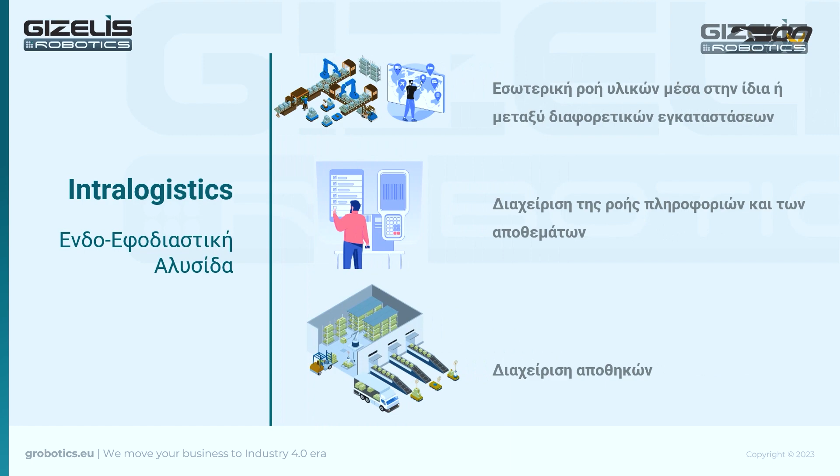Τις προκλήσεις τις γνωρίζετε εσείς πολύ καλύτερα από εμάς. Εμείς το μόνο που μπορούμε να κάνουμε είναι να είμαστε τα αυτιά σας, να ακούμε τα προβλήματα που έχετε να αντιμετωπίσετε και στην κατεύθυνση αυτή να σας δώσουμε τις κατάλληλες λύσεις. Έτσι λοιπόν έχουμε ομαδοποιήσει 4 κατηγορίες.

Το πρώτο κομμάτι αφορά την πολυπλοκότητα της εφοδιαστικής αλυσίδας, με τον αυξημένο αριθμό κωδικών, SKUs, τα πολύπλοκα δίκτυα διανομής, όπου τα προϊόντα πρέπει να φτάσουν σήμερα, καθώς και την έκρηξη του ηλεκτρονικού εμπορίου, όπως αυτή προέκυψε με όρους κρίσης εντός της πανδημίας και μετά.

Ένα δεύτερο σημείο είναι η παραγωγικότητα και τα κόστη. Γνωρίζουμε πολύ καλά ότι το να βρεις ανθρώπους σήμερα οι οποίοι να κάνουν την επαναλαμβανόμενη δουλειά ενός χειριστή είναι δύσκολο, οπότε υπάρχει δυσκολία ανεύρεσης προσωπικού. Ένα άλλο στοιχείο είναι τα υψηλά λειτουργικά κόστη, όπως προκύπτει με τις αυξημένες ενεργειακές τιμές. Έπειτα, οι απορρίψεις λόγω ελαττωματικών προϊόντων που προκύπτουν από το ανθρώπινο σφάλμα, το οποίο δυστυχώς δεν μπορούμε να αποφύγουμε. Αλλά και τον αυξημένο αριθμό προμηθευτών, όταν μιλάμε για μια παραγωγική εγκατάσταση, οι οποίοι πρέπει να επικοινωνήσουν μεταξύ τους προκειμένου να δώσουν μια λύση.

Και πολύ περισσότερο τη στενότητα, τη συμφόρηση, το bottleneck που λέμε, στο τέλος της γραμμής, όταν ένας χειριστής περονοφόρου καλείται να παραλάβει μια παλέτα ή να διακινήσει προϊόντα.

Ένα τρίτο στοιχείο είναι η ασφάλεια και η αειφορία. Η ασφάλεια, νομίζω είναι κοινός τόπος, αποτελεί πρώτη προτεραιότητα των οργανισμών. Αλλά όταν μιλάμε για διακίνηση υλικών, μιλάμε για μετακίνηση μεγάλων φορτίων και για ατυχήματα που μπορούν να στοιχήσουν ζωές, να προκαλέσουν τραυματισμούς, κάτι που σε καμία περίπτωση δεν θέλουμε στις εγκαταστάσεις μας σήμερα. Αλλά και την ελλιπή εργονομία, όπως αναφέρθηκε και νωρίτερα, για τα σακιά τα οποία πρέπει να στιβάξει κάποιος πάνω σε μια παλέτα.

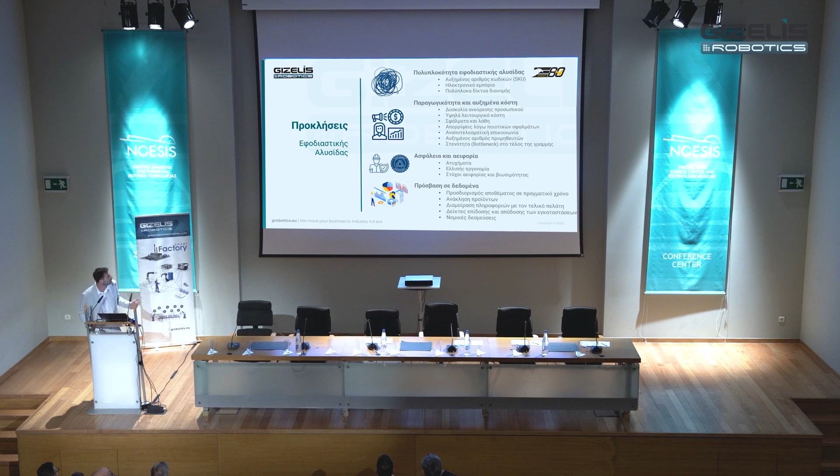Τελευταίο κομμάτι είναι η πρόσβαση στα δεδομένα. Και όταν λέμε δεδομένα, μιλάμε για τον πλούτο μιας εταιρείας. Είναι τα στοιχεία εκείνα που επιτρέπουν στους οργανισμούς να λαμβάνουν σωστές αποφάσεις. Ο προσδιορισμός λοιπόν του αποθέματος σε πραγματικό χρόνο είναι κάτι το κομβικό, και είναι κάτι το οποίο μόνο ένας ψηφιακός μετασχηματισμός μπορεί να μας δώσει. Αλλά και η διαφάνεια που απαιτείται σήμερα και συχνά η απαίτηση από τους πελάτες μας να τους δίνουμε στοιχεία σχετικά με όλη την παραγωγική διαδικασία που αφορά το προϊόν μας. Αλλά και τους δείκτες επίδοσης που έχουμε θέσει, τα KPIs, προκειμένου να μετρήσουμε την απόδοση των εγκαταστάσεών μας και τα στοιχεία τα οποία καλούμαστε να διαμοιραστούμε από τις νομικές δεσμεύσεις τις οποίες έχουμε.

Πώς διαμορφώνονται όμως τα σύγχρονα intralogistics και πώς θα αντιμετωπίσουμε τις αυξημένες προκλήσεις της εποχής. Όλοι έχουμε ακούσει πολλούς όρους εδώ μέσα σήμερα, robotics, AGVs, κινητά ρομπότ, αυτόματες αποθήκες, περονοφόρα, ταινιοδρόμους, WMS, ERP, συμβατικές αποθήκες. Όλα αυτά έρχονται παρέα και με έναν εγκαταστάτη, με έναν προμηθευτή, δημιουργώντας ένα χάος στον τρόπο που θα λάβει την απόφαση ο επιχειρηματίας για το πώς θα κινηθεί.

Η απάντηση που δίνουμε εμείς σε αυτό είναι ότι επιλέγουμε να σας δώσουμε μία λύση από μία πηγή. Η GIZELIS ROBOTICS με τα ρομποτικά της συστήματα, σε συνδυασμό με τις ολιστικές intralogistics λύσεις της Electric 80, έρχονται να καλύψουν τις ανάγκες σας και να κουμπώσουν στις υφιστάμενες εγκαταστάσεις σας, στις συμβατικές σας διαδικασίες, στον τρόπο που δουλεύετε σήμερα.

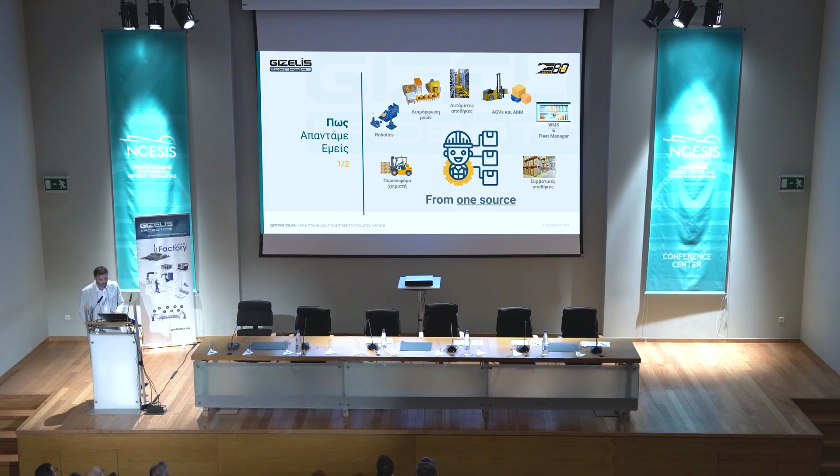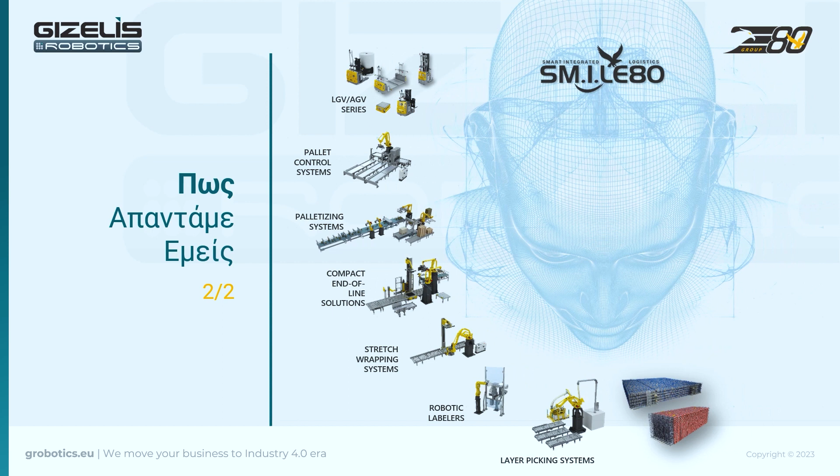Όλο αυτό γίνεται με τη βοήθεια ενός λογισμικού, το SM.I.LE80 της Electric 80. Είναι ένα λογισμικό το οποίο ενοποιεί πρακτικά τις επιμέρους τεχνολογικές λύσεις, είτε μιλάμε για παλετοποιητικά συστήματα, είτε για LGVs, είτε για αυτόματες αποθήκες, μηχανές περιτύλιξης, μηχανές ετικετοποίησης και πάει λέγοντας. Αυτός είναι ο τρόπος που προσεγγίζουμε εμείς τις λύσεις και γι' αυτό έχουμε την αυτοπεποίθηση ότι θα δώσουμε λύσεις στα προβλήματά σας.

Αυτό λοιπόν που συμβαίνει με την Electric 80 και τη GIZELIS Robotics είναι μια στρατηγική συνεργασία παροχής ολιστικών λύσεων σε όλο το φάσμα της ενδοεφοδιαστικής αλυσίδας.

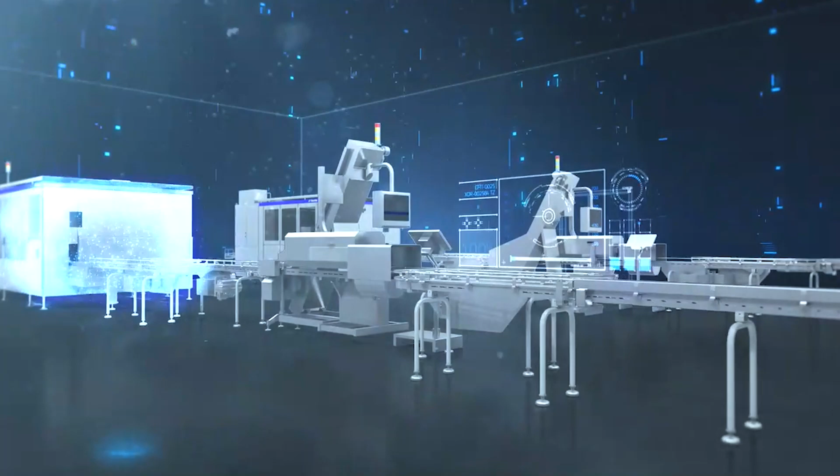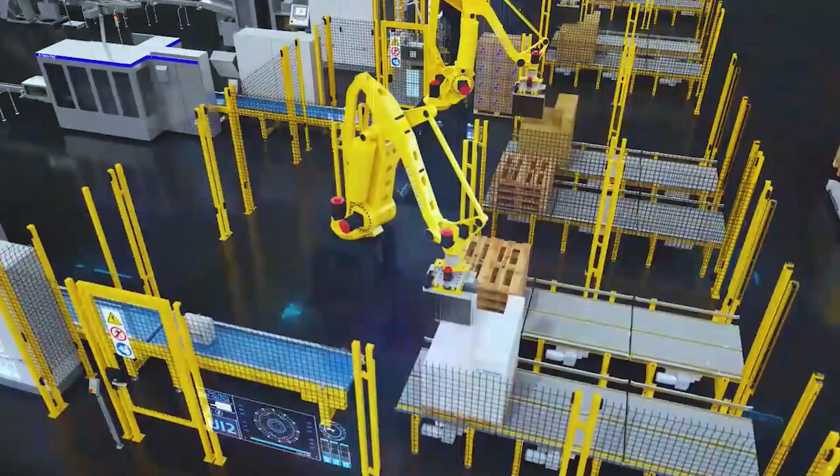History led us to achieve levels of excellence in hardware, but today this is not enough to guarantee true efficiency. If we imagine the factory as a great orchestra, the position of the conductor is up to the software. And precisely here, at this level, we think to make the difference by ensuring a unique level of integration, flexibility and efficiency. The objective is to automate all operations.

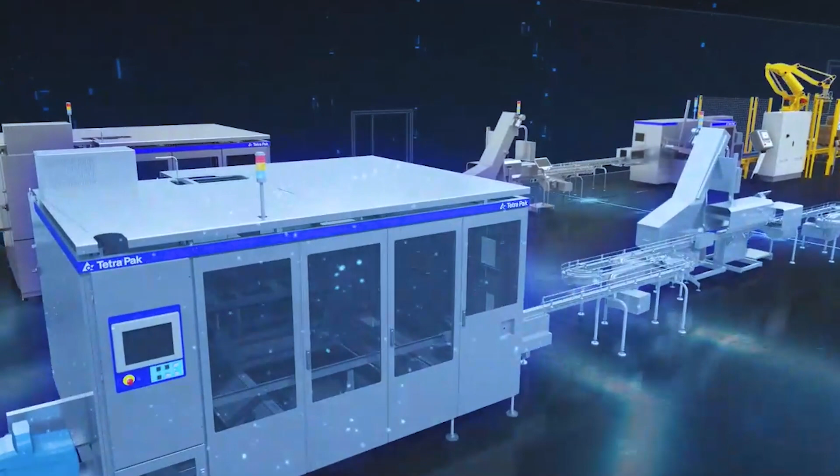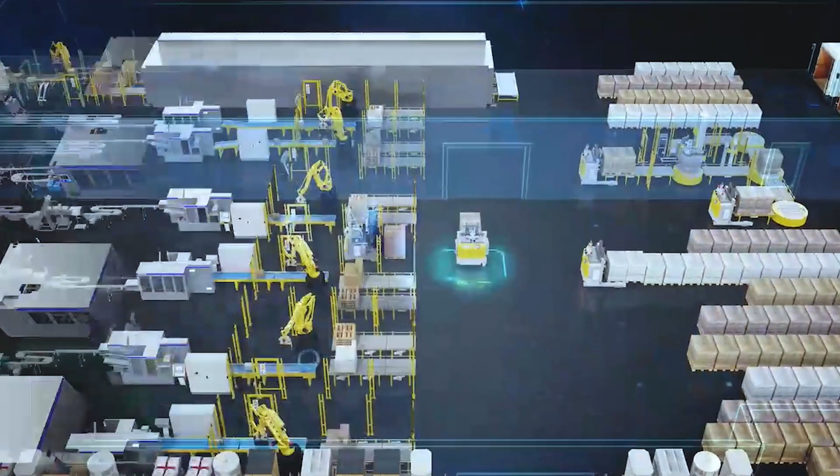The result is a higher efficiency of the whole factory with 100% reliability on all the operations, a massive reduction of the manpower costs and all related inefficiency, eliminating accidents to people and damages to products, equipment and structures.

The customer ERP communicates the incoming orders of packaging material, raw material and customer order. Here, Tetra Pak Plant Master and Smile 80 software platform come into play in the management of the factory.

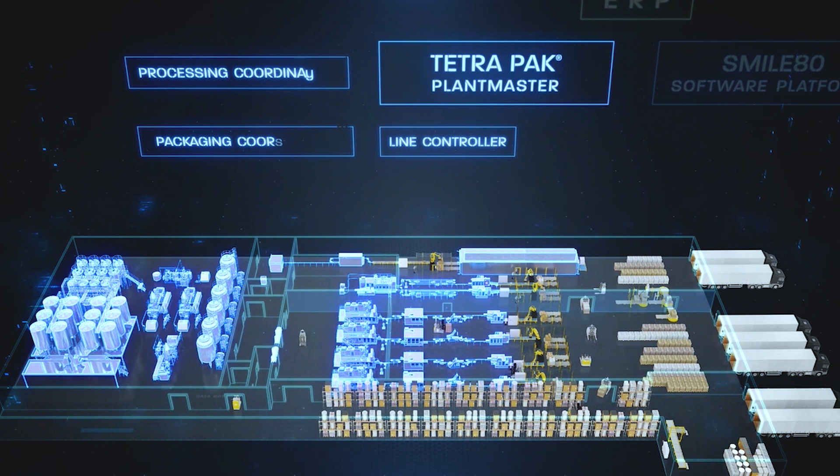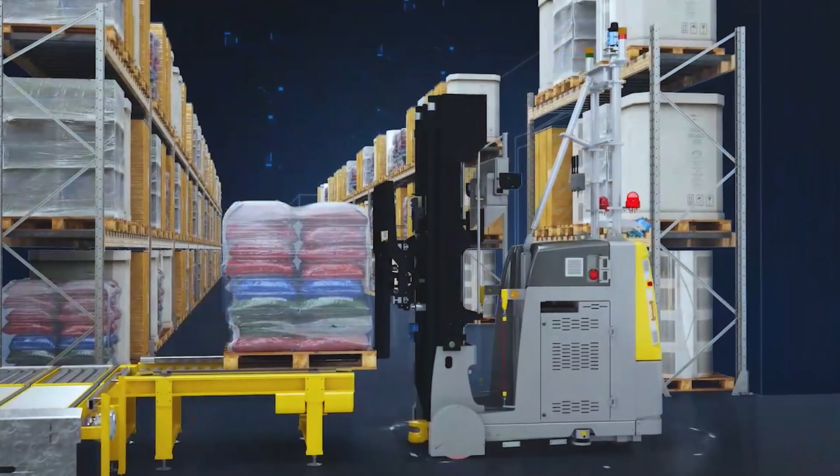Tetra Pak Plant Master receives orders and executes the recipes and monitors production in the processing area. Ingredients and materials are tracked in Plant Master from arrival to dispatch with live traceability.

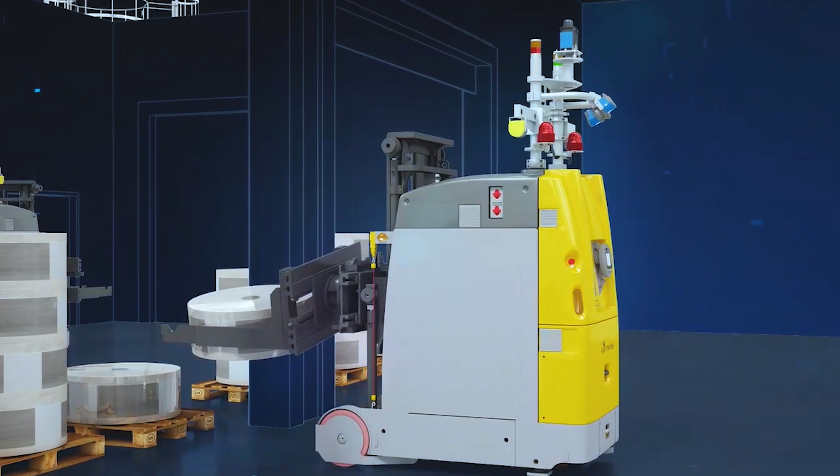Product recipes are created, managed and executed in Plant Master, ensuring the right ingredients are used in the right product, at the right time and in validated quantities. Reporting and quality assurance are delivered automatically, giving you live control and oversight of the product that you produce.

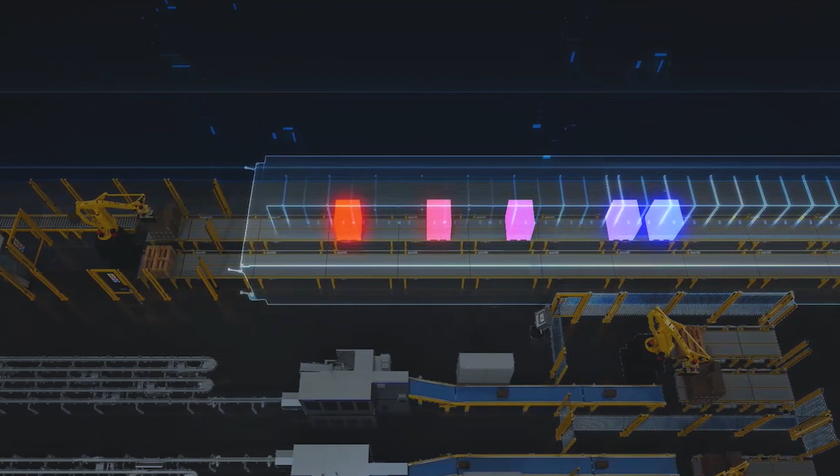In Plant Master, production runs can be preloaded and automatically produced with plant cleaning planned and scheduled to optimize production efficiency and maximize utilization.

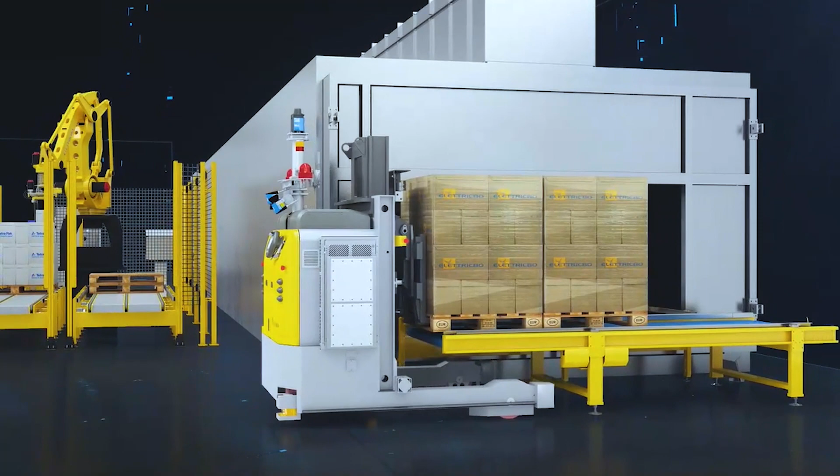Customer-specific orders are communicated to the packaging lines that execute the customer-specific production batches in the packaging area. Plant performance and operation can be measured and tracked from the whole factory down to single component level, allowing maintenance to be tailored and planned into the most efficient, cost-effective regime.

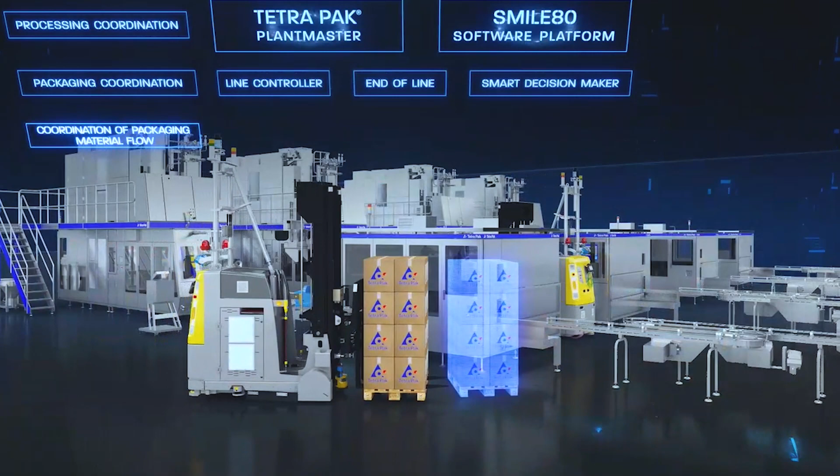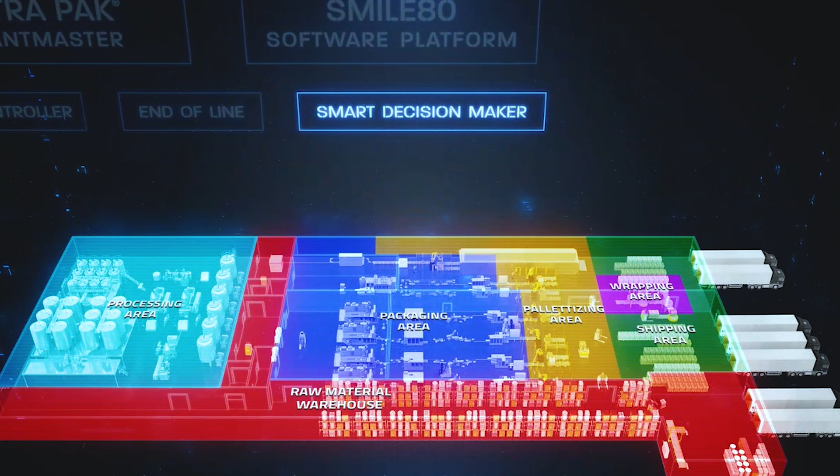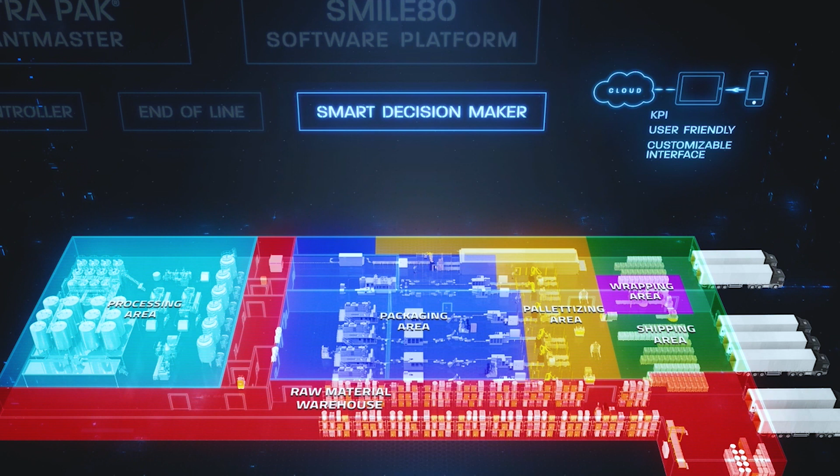This is also achieved thanks to the Smart Decision Maker, SDM, that is the core module of the Smile 80 system. SDM is the decision-making logic that supports all the logistic operations and is designed to direct all the business processes. At the end of the line, Electric 80 robotic palletizers perfectly integrate into Tetra Pak line controllers and PlantMaster.

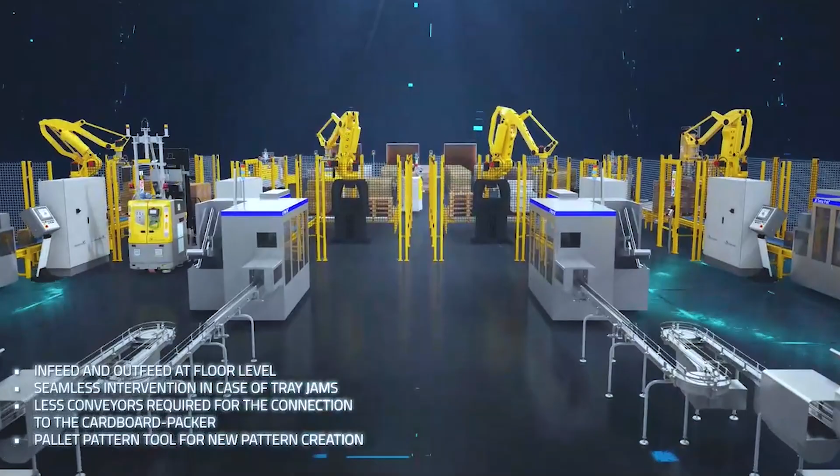And offer top performance. Straddle LGVs will then pick up pallets of finished goods, 2 at a time, and transfer them to the BEMA wrapping system.

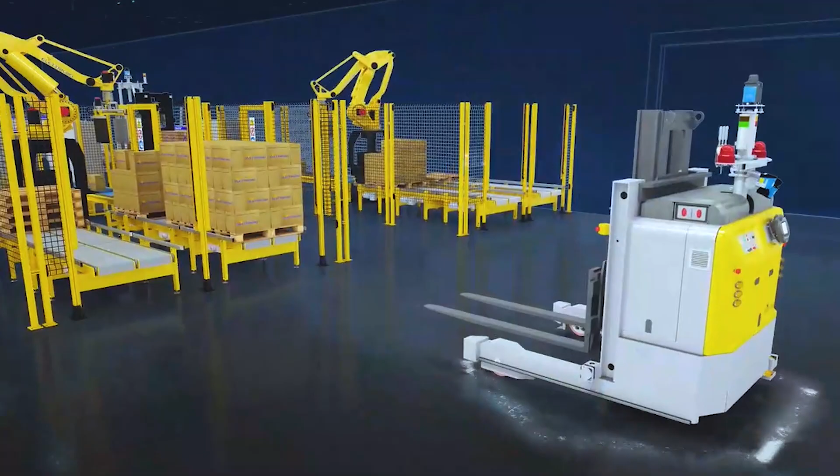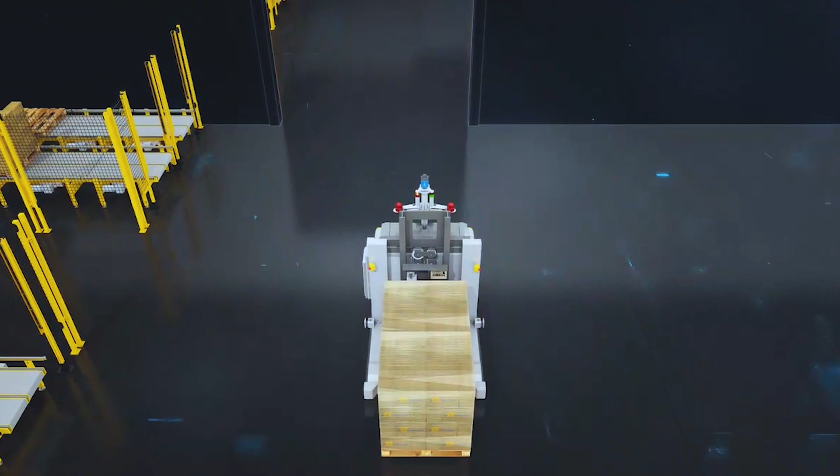LGV Manager will be reading the accumulation status on each line and dynamically prioritizing the pickup, with the target of never stopping the fillers. LGV Manager will also be reading the status of downstream equipment and dynamically rerouting the LGVs, in case some of the equipment are not available, and assigning the pallets a destination.

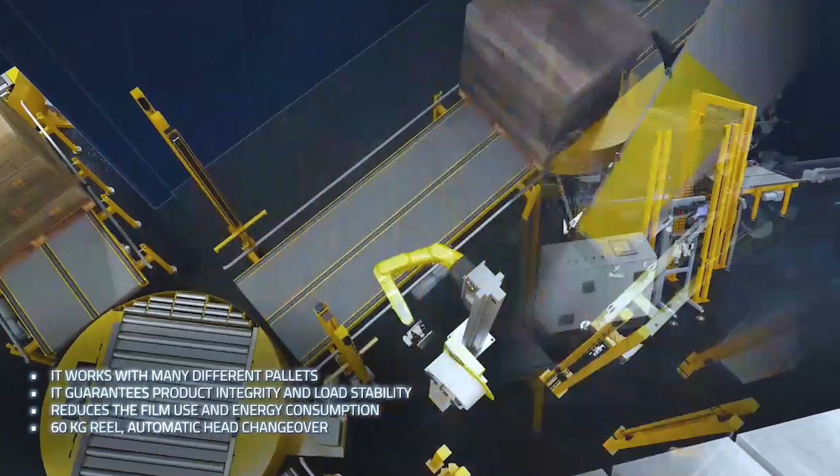Chilled products will be staged in the cold room, all other products in the ambient temperature area. BEMA Silkworm high-speed robotic stretch wrapping systems perfectly integrate with Electric 80's solutions.

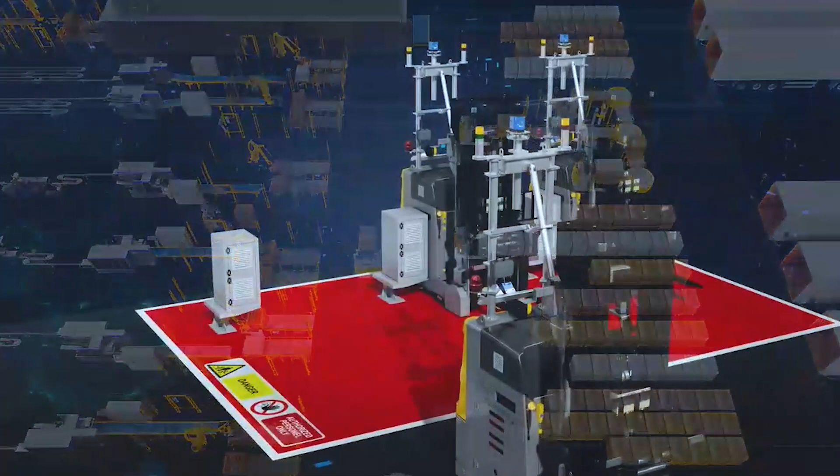We also offer package and pallet traceability by providing integrated robotic marking solutions. Electric 80 developed an innovative solution with lithium batteries and applied it to this unusual and specially featured system.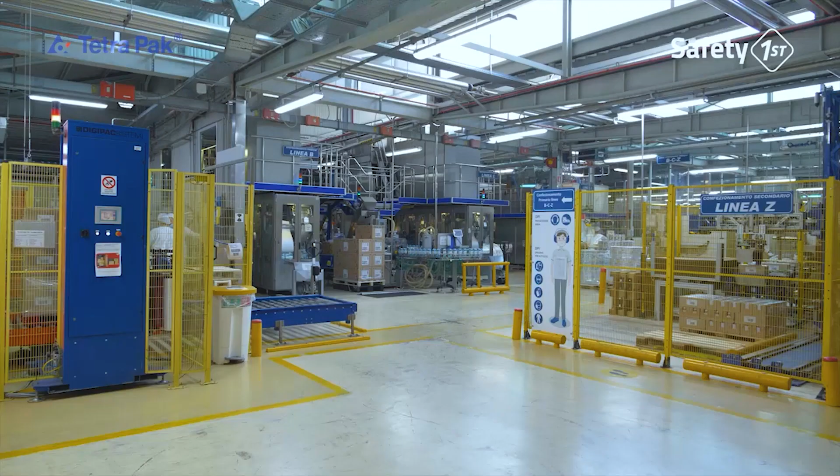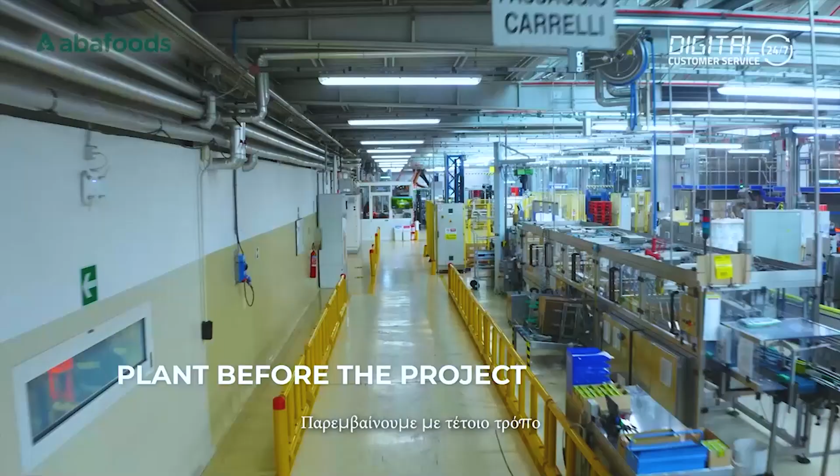Additional challenges were to fit such a solution in a rather small factory footprint, optimizing the use of existing space and implementing the project without stopping production, but selectively intervening to secure our capability to keep serving our customers and consumers while transforming the site. It is important to highlight that during the design phase of the project, great attention was put into making sure the changes were future-proof, hence developing a layout able to sustain future growth in a logical manner.

Performance and efficiency improvement through innovation, automation and safety are the key elements that have driven the end-to-end solution project together with Abafoods. The complexity of the project needed an end-to-end teamwork involving our partner E80 Group since the preliminary study. Flexibility and adaptability to the situation were key to succeed.

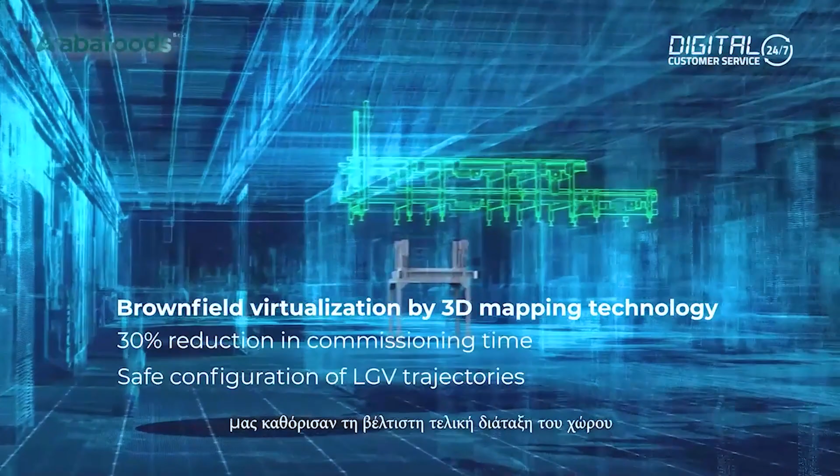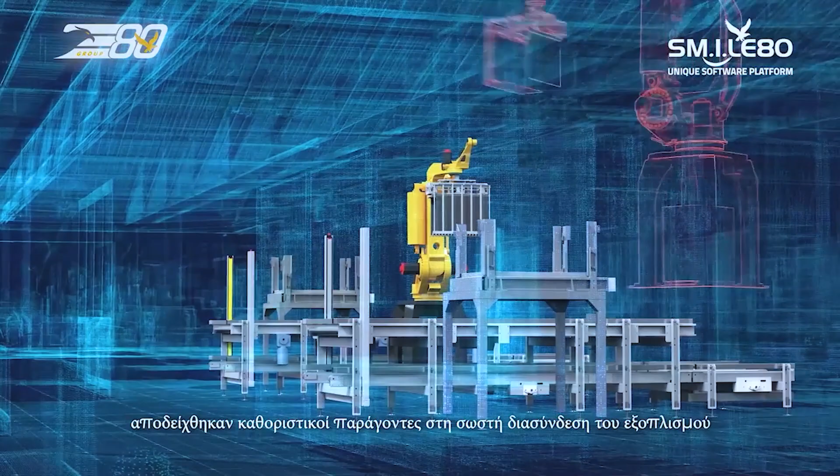The experience of our engineers, combined with the most advanced technology of 3D mapping, were able to identify the best possible layout. Besides, our collaboration with Abafoods and all the suppliers was key to deliver compact and efficient interconnected equipment to Abafoods' integrated system.

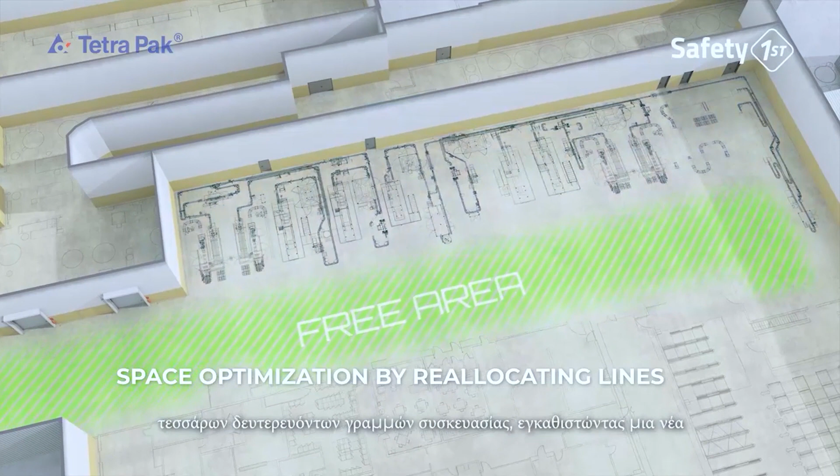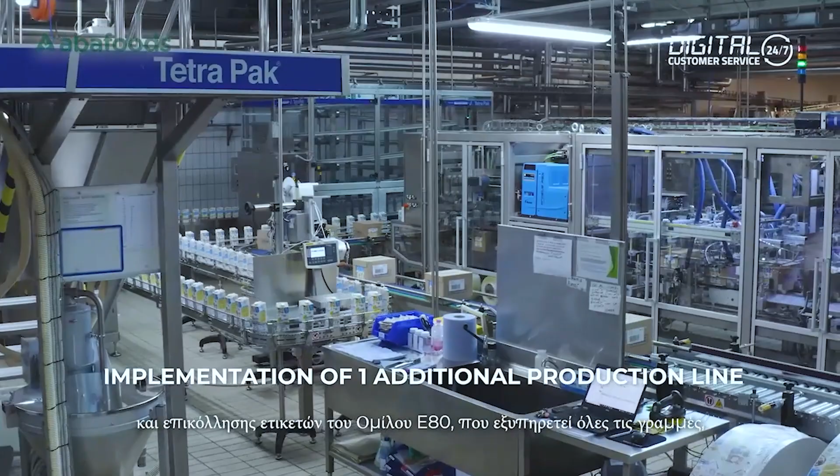Thanks to the collaboration and the strong planning work, we were able to deliver a complex project where we changed the layout of 4 secondary packaging lines, installing a new end-to-end line from the processing Tetra Therm Aseptic VTIS to one centralized E80 Silkworm wrapper labeler serving all lines, with no impact on production continuity, but reaching Abafoods' efficiency targets. Altogether, we were able to optimize the space, increasing the safety for the operators and the total efficiency of the plant.

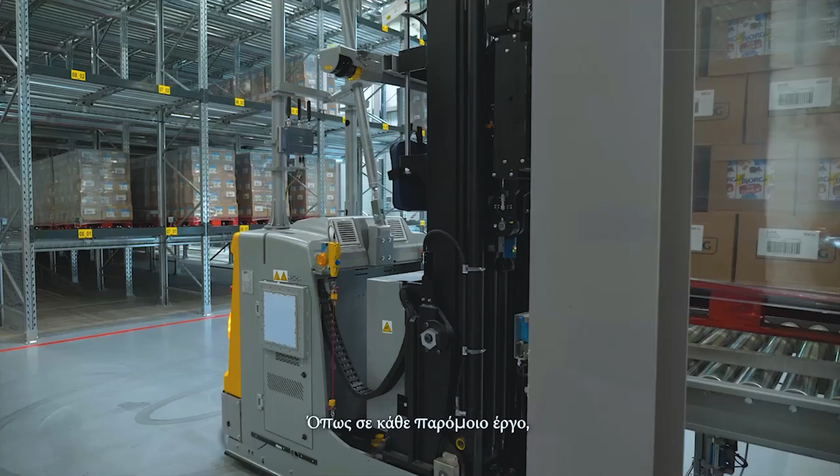We already prepared the plant for the installation of new future added lines for a customer like Abafoods, where we wanted to be the partner to support their growth ambition with our innovative, sustainable portfolio. With many similar projects, the main challenge is working in a brownfield plant, where the plant is not made to fit the solution, but the solution has to be made to fit the plant. We got around this problem with our 2 advanced design tools.

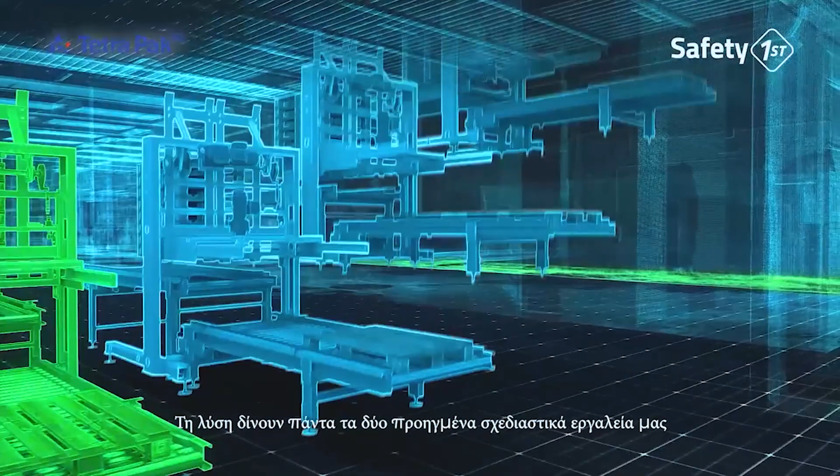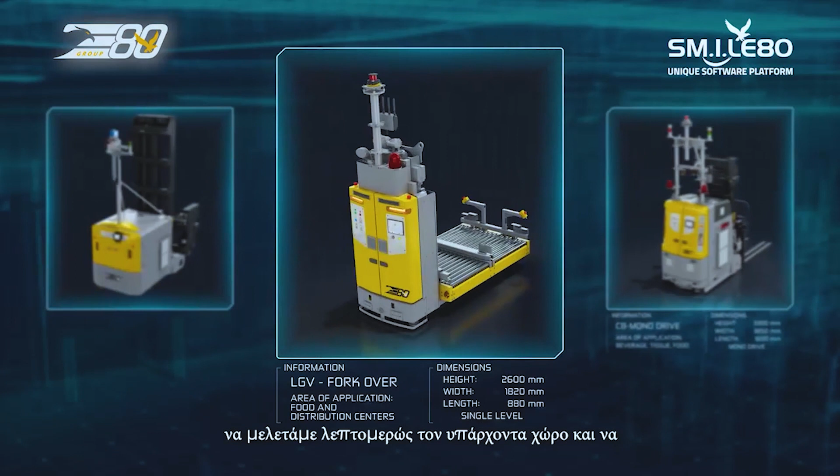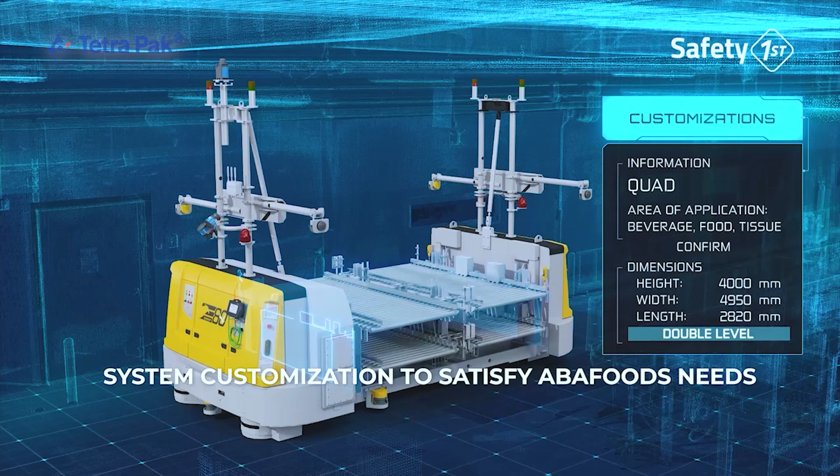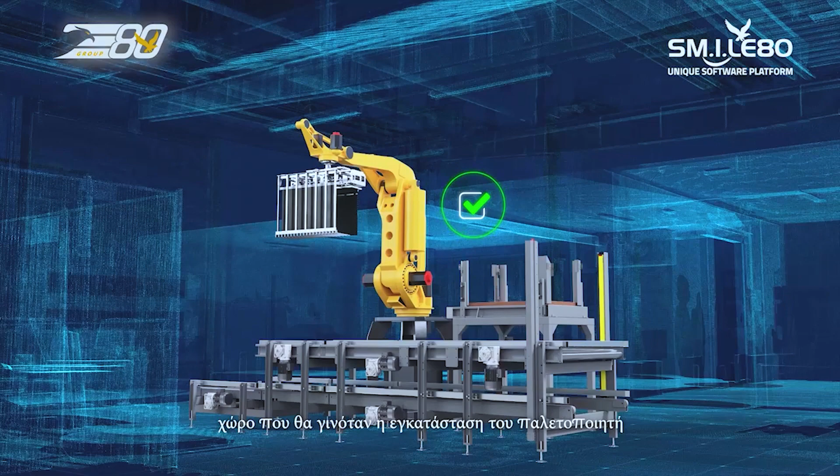The first thing we did when Abafoods gave us the go-ahead with the project was to 3-dimensionally scan the plant, obtaining a very precise digital representation. This technology is extremely helpful when it comes to brownfield plants because it allows us to study in detail the existing space and create an accurate layout version of the customer factory. With 3D mapping, when we were in the design phase, we could already see that there would be a potential collision between a palletizer anthropomorphic arm and a ceiling beam in the space where this palletizer would have been installed. Our smart design tool offers additional benefits.

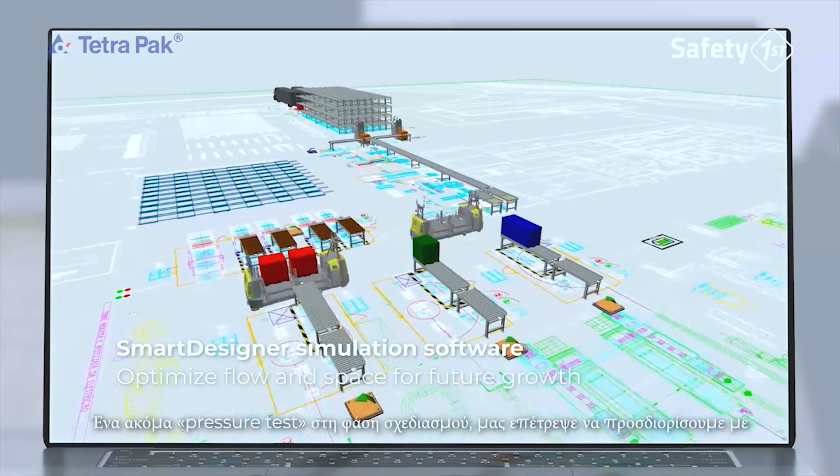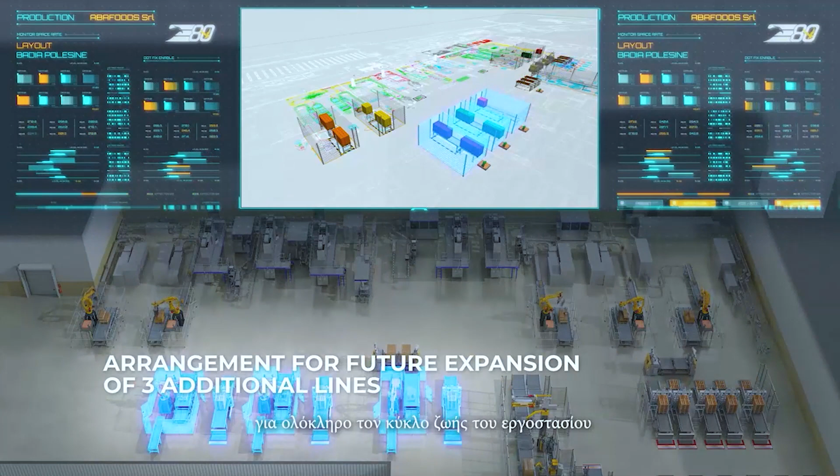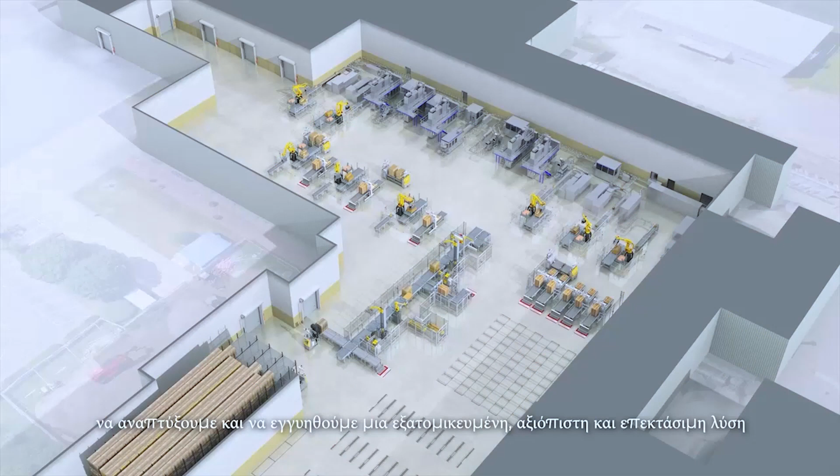For Abafoods, we simulated the flows of the factory, evaluating all operating scenarios, both current and future. A pressure test in the design phase allowed us to identify with 95% reliability the most efficient intralogistic solution, responding in advance to future increases in production and the next expansion of the plant. This commitment to system performance is a feature that we are able to achieve for the entire life cycle of the plant. These two tools have allowed us in the design phase to develop, implement and guarantee a customized, reliable and modular solution, optimizing the existing tight spaces.

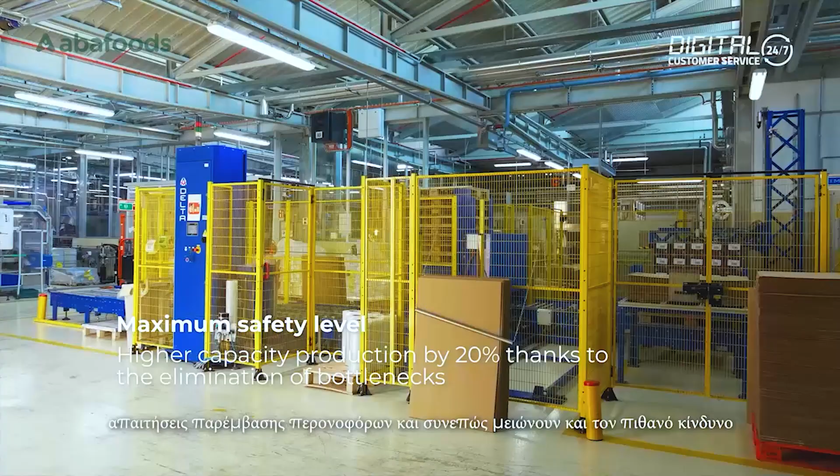As for future modifications and expansions, with our increasingly innovative modular solutions, we can change and add solutions as if the factory were made of Legos. And all of it will continue to be optimized and managed by the LGV system and SM.I.LE80 software. All the different goals have been achieved by the project. The safety of our intralogistics system has been improved by using LGVs, laser-guided vehicles, which greatly reduce forklift pedestrian interference and the consequent risk of incident, a risk that resulted in 11 near misses just in 2021.

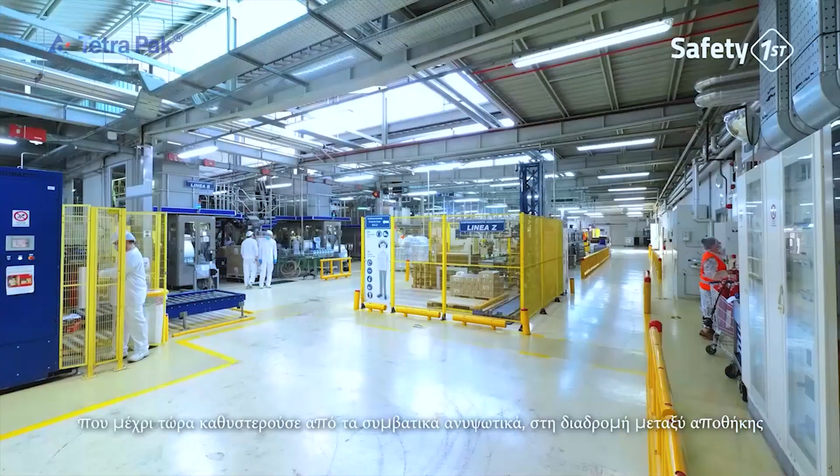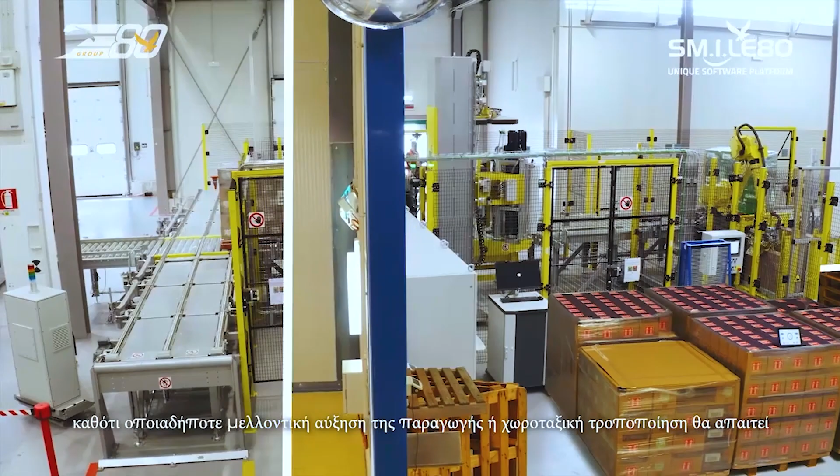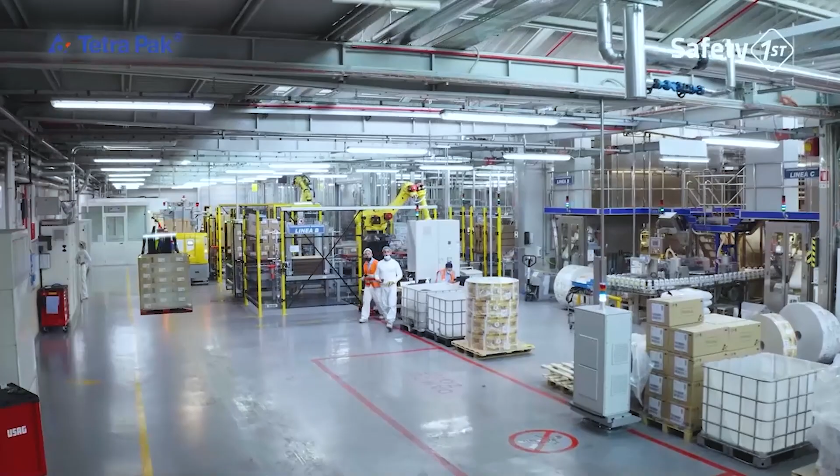Moreover, the relayout designed together with E80 and Tetra Pak and the use of LGVs have allowed us to remove a critical bottleneck in the material flow that was caused by the forklift missions starting from the warehouse and going to the manufacturing hall to retrieve the finished products. The solution, designed by E80 in team with Tetra Pak and Abafoods, is also more efficient and more flexible, since any future increase in production lines or layout modifications will only require a rerouting of the LGVs instead of the dismantling or the building of floor anchor structures to move the materials. This leads to increased efficiency of all intralogistic operations and also to a reduction in our environmental impact.

As far as return of investment is concerned, I'll give you one piece of data. If it had been necessary for us to build a new production floor, we would have easily spent 5 to 6 million euros. However, by optimizing the existing space, thanks to the E80 group studies and technology, we only invested 1.5 million for the infrastructure, and with the difference, we have implemented an automated and integrated intralogistic solution without ever stopping the production.

Okay, so to summarize the advantages, they reutilized the existing space. They found space not just for the fifth line, which is up and running together with the existing four, but we found the space for another three in order to bring the total of lines to 8. They avoided building a new facility. They increased by 8% the volume on pallet and reduced CO2 by 50 tons per year. They saved 15% plastic film consumption due to our wrapper and our technology.

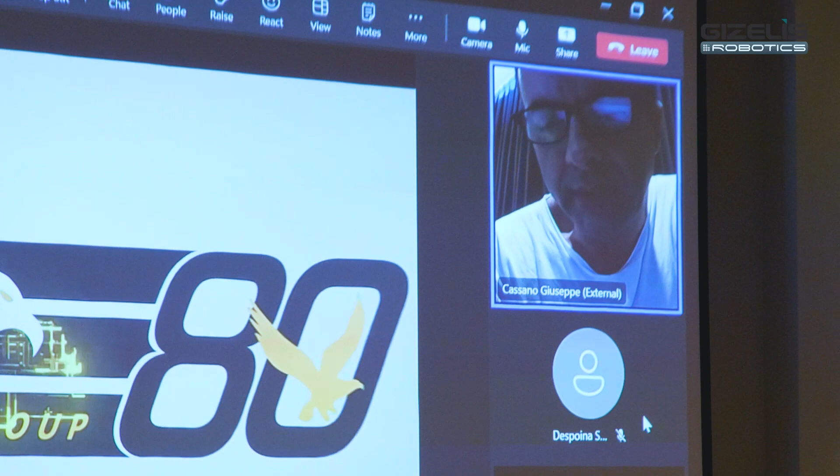Thank you, Giuseppe. And at this point, we would also like to wish you happy birthday.